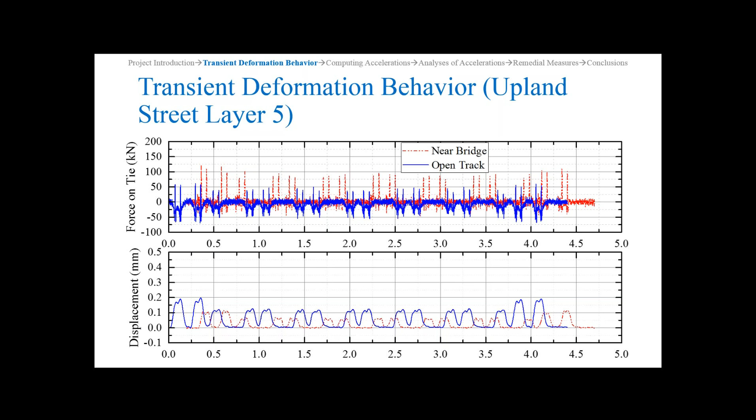And also for layer 5, which is the deepest layer, we see again we have small deformations compared to what we observed in layer 1, and in open track location it displayed again slightly higher deformations than near bridge location.

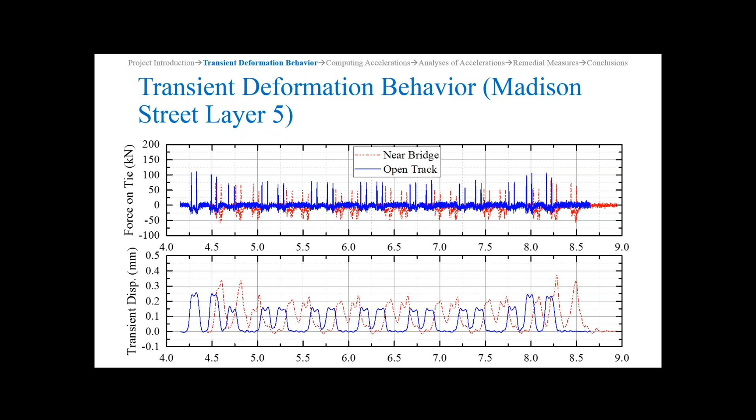So we summarize the contribution of the layer 1 deformation to the total deformation in percentage, and we realize that more than 50% of deformations occur in layer 1, and actually in the Upland case they are significantly higher than open track locations as a contribution. In Madison, they are again both over 50%, except for August 2012 measurements, where we have a higher percentage of deformations occurring in open track location.

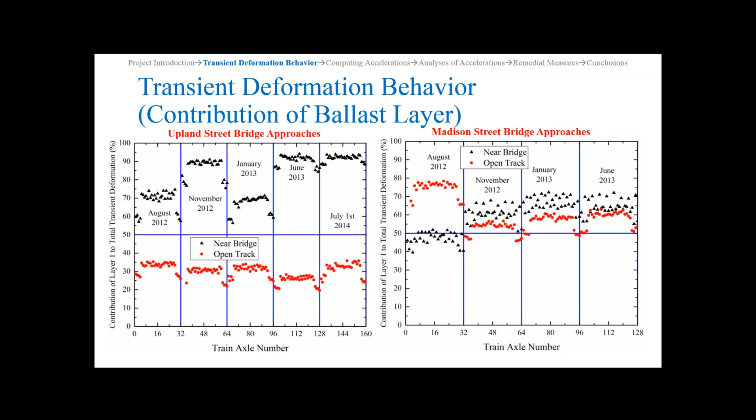Now, this specific equation has a disadvantage of losing 3 points at the beginning and the end of the displacement time history, but again, we use a sampling frequency of 2000, and we start the measurements before the train hits the instrumentation location and stop it after it leaves. So it wasn't actually a very disadvantageous thing. It was quite negligible.

The reason is that since we have a sampling frequency of 2000 Hertz, we have information in the displacement time history from 0 Hertz to 1000 Hertz. So we need to choose a filter that will give us what we focus on in this project. This displacement time history includes information like, to give an example, not just what we're interested in, but rail surface roughness, wheel problems on the train, and train suspension problems alike, which we were not interested in. So what kind of filter should we use?

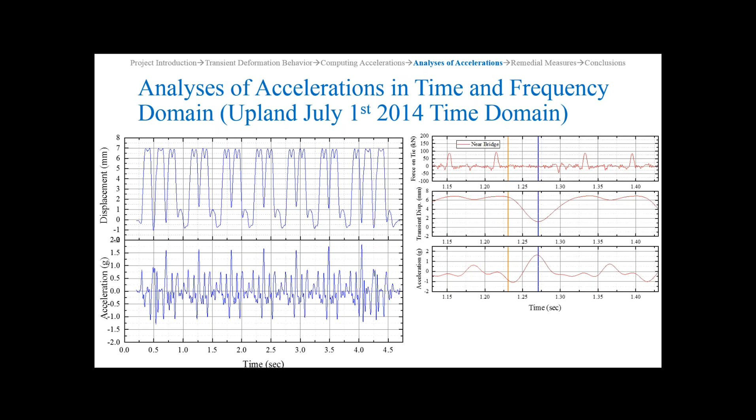When we use fast Fourier transform and convert from time history to frequency domain, I should highlight that the second y-axis in these plots is scaled using the maximum obtained from the near bridge location, keeping them the same and scaling the second axis to compare both figures, because it was nearly impossible to put them in the same figure, as the open track locations are significantly lower than the near bridge location. We see the trend for open track location has peaks observed between 15 to 17 Hertz, which corresponds to axle spacing. But for the near bridge location, the peaks have been obtained between 7 Hertz to 13 Hertz.

Again, remember we have a 12 feet distance for the bridge, so this falls into the domain for this location. We can see from the acceleration frequency domain that we have significant contribution due to the bridge rather than the open track location.

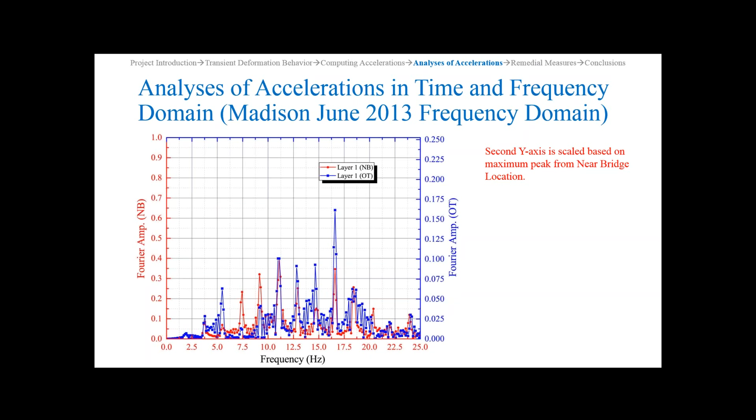Now we realized the main problem is the tie gaps due to differential settlement. The main problem is the tie gap, so the remedial measures we applied should fix that problem. We have used three remedial measures: polyurethane injection, under tie pads, and stone blowing.

Polyurethane injection, or chemical grouting, was applied at the previously instrumented Upland location. Stone blowing was applied at the previously instrumented Madison Street bridge. And we instrumented a new location that we did not have previous information on, which was under tie pads. It was still on the Upland Street bridge, but at the other side of the bridge on a different track—this is like a 4 parallel track.

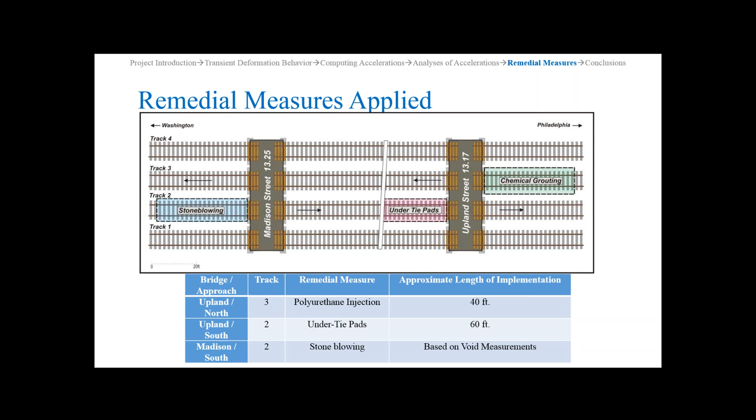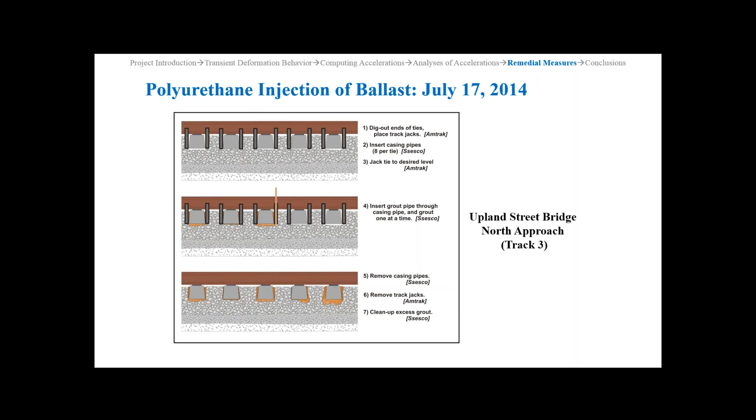Now when we look at the polyurethane injection, the point was that we hope to insert those tubes, then put 2-component polyurethane inside those tubes. This polyurethane works by having 2 components, and when they mix they immediately start to expand, so it becomes a foam. We were hoping to fill under the tie with that foam structure using the polyurethane.

When we installed that, we realized we had a lot of trouble actually injecting the polyurethane inside the tube, because the track was significantly degraded. There was a lot of foul material. So we can actually see glue coming out as foam as we install and insert them inside.

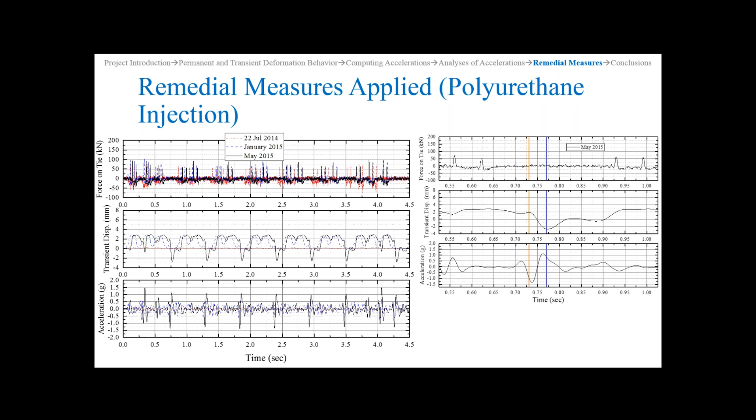Now we also applied stone blowing. The purpose of stone blowing this time was using smaller particles, which were half inch to three-quarter inch particles. We lift the track, we lift the tie, and we insert smaller particles under the tie, filling that gap with smaller particles to supply new support.

And you can see the permanent settlement behavior. There were problems with the LVDT, so we had to reset them, but you can see what happens after stone blowing—we lifted the track, and you can see the deformation behavior. It doesn't deform a lot.

But now when we look at the time histories this time, those are all again near the bridge. We do not see significant deformations in January. In May we do not see significant deformations either. There is no significant negative displacement—there are some, but they are not significant, around 0.5 millimeter, and those accelerations are less than 0.5 G.

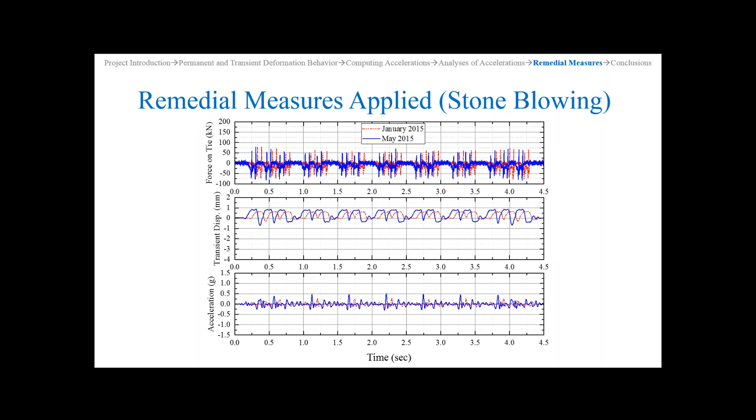So basically, we can say that stone blowing works in terms of supplying support under ties to prevent lifting and excessive dynamic loads.

Under tie pad location, under tie pad installation: what we have done here, those ties include under tie pads already installed. Basically, they are the elastic pads glued under the tie, and we replaced 30 ties from the bridge as a block of ties and placed the under tie pads in this location.

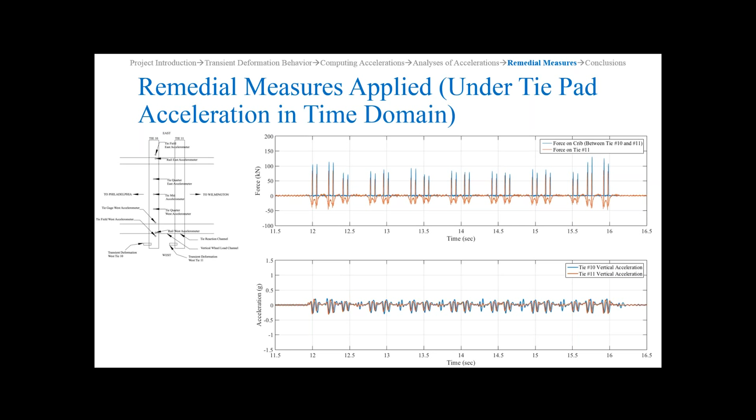But again, we did not have multi-depth deflectometers in this location, so we used a different instrumentation to calculate the transient deformation. As you see, with the under tie pad installation, we do not have a significant vertical deformation, as well as no negative displacements. And when we compute the accelerations, they were small.

And again, when we transfer those accelerations from the time domain to the frequency domain, we have seen a good trend, which is the axle spacing frequencies display higher peaks than the bridge distance.

With that, I'd like to conclude with 3 points: the ballast layer is the primary source of transient deformations near bridge locations. Negative displacement observed near bridge locations is caused by unsupported ties, which was the main problem of bridge approach problems. And remedial measures to supply lacking support to unsupported ties remediate the problems observed, such as stone blowing.

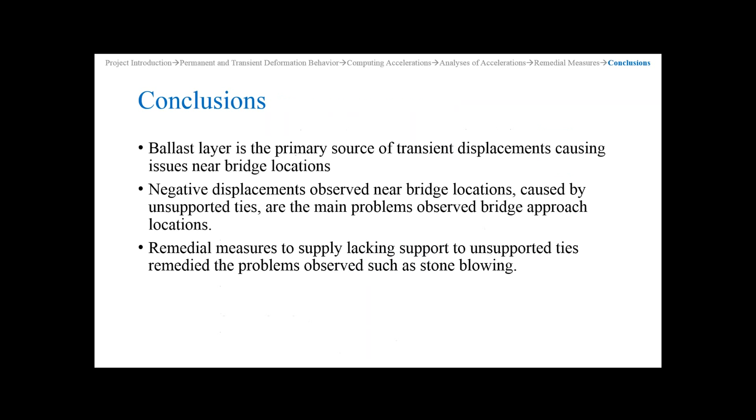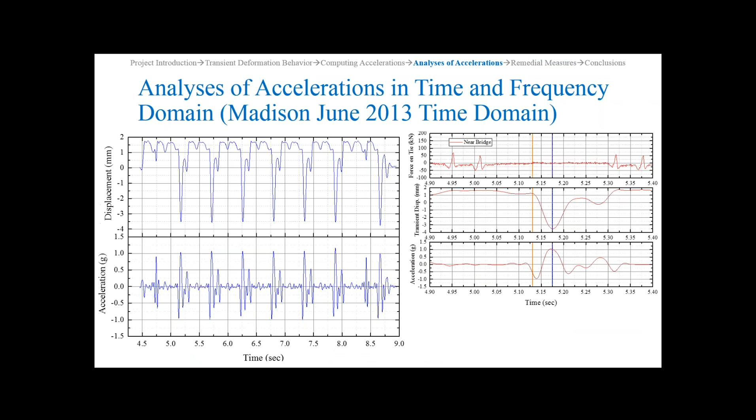If you have displacements, you have everything crystal clear. Actually, that's what we did. We used one of the ballast deformations with one LVDT measured, and that's how in the 30 tie track panel case, we were able to check accelerometer readings with the way we did filtering for results with the LVDT installed displacement measurements and the accelerations based on that.

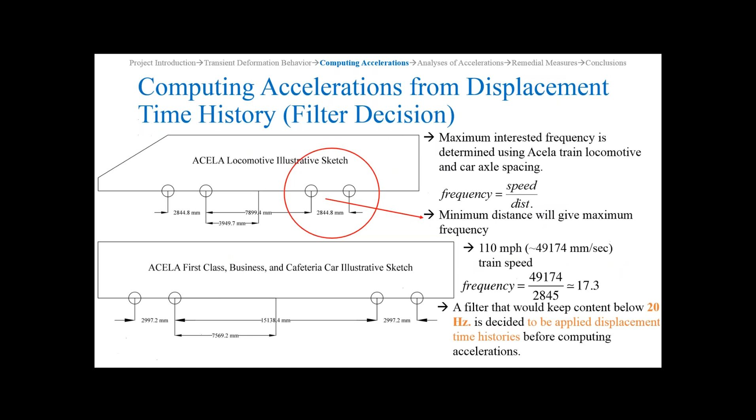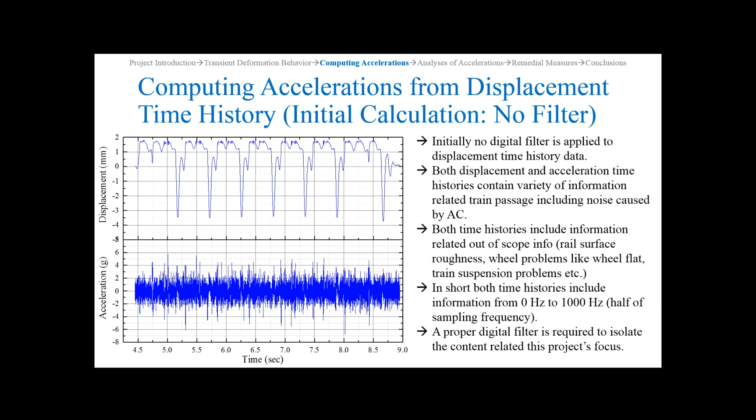So using the same concept, we were able to do all the other MDD results. So if we had used acceleration directly at first, we wouldn't be confident to use a 20 hertz filter because we would not have this plot in displacement. You can see here that actually the content is below 20 hertz. With accelerations, if we apply this filter directly, we were going to reduce significantly, and we were not going to confidently see what's happening, what is the important content that we are interested in.

This is another point, a follow-up question. Because geophones and accelerometers are commonly used when you really want to monitor high frequency movements. This is earthquake instrumentation, FWD as well, because we really apply an instant pulse loading. I think there must be a reason why people have been using geophones or accelerometers. One of the things I'm thinking about is, in high-speed measurements, are you using LVDT with a spring?

No spring. Well, they're not spring loaded. You don't have the luxury to be able to install MDDs at every location where you want actual dynamic responses, right? That's going to be so costly, almost impossible. Accelerometers really help with that, with any anomalies and things.

If you stick with the way that you filter and analyze the accelerometer data, that's what people are doing. But then, depending on the different dynamic loading trend, different train loads and things, axle spacing, like he mentioned, some of the filtering techniques may cause missing data, and you may not be seeing the full picture.

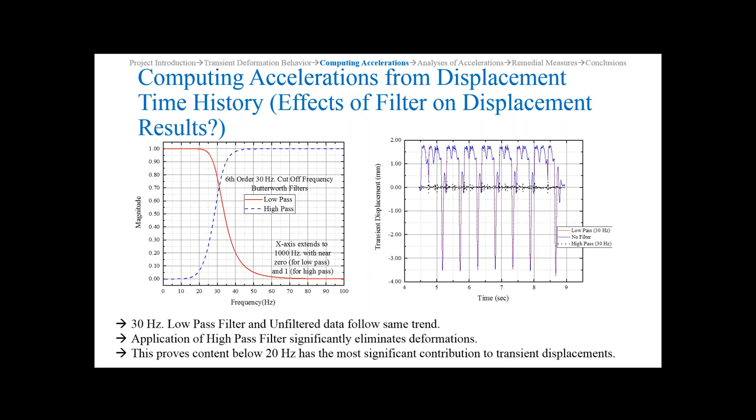But again, I think you missed that one, Hussein, but you should remember, when we go back to the track panel, where Mike Thomas instrumented accelerometers right there, putting them in different places, at really high frequencies you can see the bending modes of the ties. That's how some of the RailTEC researchers are working now on tie designs and things. So, it depends on what kind of dynamic loading aspects, but again, that wasn't our objective.

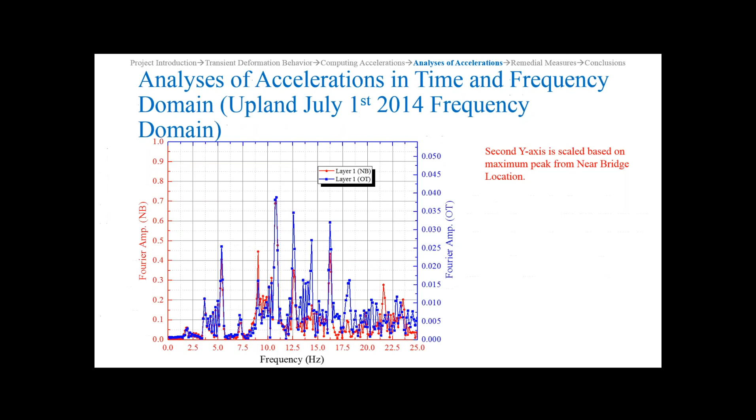Our goal is to track substructure vibrations. This tie wasn't the focus of this presentation, but if you look at this figure, you see there are six accelerometers, and eight total on this tie. They are installed on the rail too, at different locations of the tie. This wasn't to investigate transient deformation, but to investigate the bending of the tie.

Is there any effect of moisture in what you're measuring, in the track structure substructure? We haven't specifically looked at what moisture does to the substructure, though we have measured displacement in four climates. Is a certain set of data affected by high moisture in springtime? Yes, in January with freeze conditions we have smaller deformations, and in spring we have higher deformations, but we did not specifically focus on that.

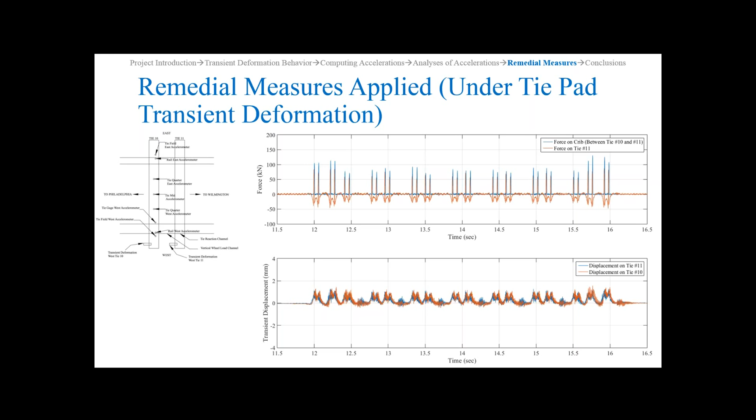One of the things that really worked very well is stone blowing application, and we didn't expect this to work that well. I don't know if Hussein can comment on that. What's going on in stone blowing and why? Here's the thing, how it worked and why it worked. Well, let's get Hussein on why it worked.

In fact, every 3 months they used to have this gap opening in those instrumented ties at the bridge approach. After stone blowing, for 12 months, almost a year, there wasn't much tamping or maintenance needed. It used to happen every 3 months. I was just talking to one of the AMTRAK people yesterday. He was amazed at how stone blowing, being an old approach primarily used in the UK and Europe and not much here, they even have huge equipment to do that kind of maintenance activity in Europe, but not here.

It clearly helps because of what? Let's say this is the original position of the rail, and there is a gap underneath, and we have ties near the bridge, let's say 6 or 7 ties at that location, with the distance between ties being 2 feet. Now when the wheel hits that, it basically deforms the rail, leaves it, and the rail wants to go to its original position, gaining momentum and acceleration doing that, and it jumps.

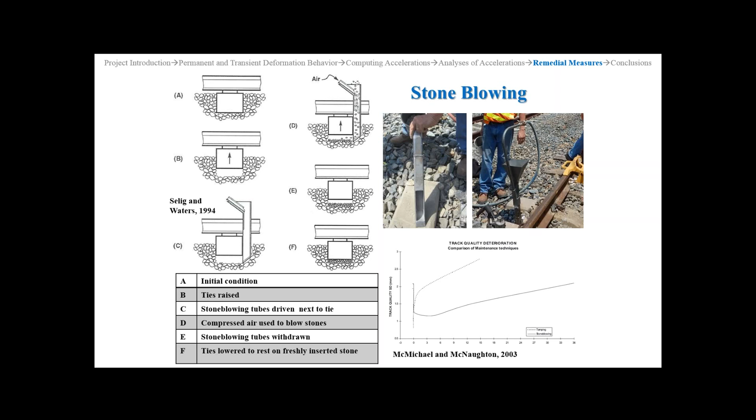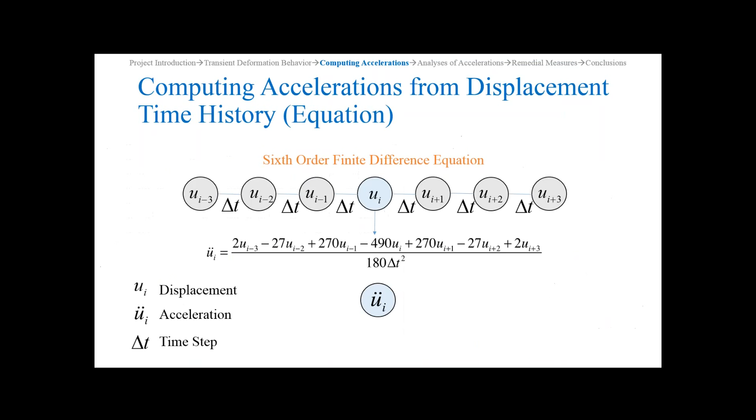When we instrumented the loading, I should go back to the beginning for the strain gauges, what we did there. But those are field responses, right? Yes, so I was asking in terms of applied loading, which leads to another follow-up question. We can ask that after this.

For that one, we have two shear strain gauges, one on top of the tie and one on the crib side. By crib side, I mean between the ties. We assume that with the displacement here, this load is full, so we can calculate the tie support by comparing this load to that load.

We analyzed those and saw differences between the near-bridge location and the open track location. Usually in the open track location, where there is good support under the tie, we see a good percentage of tie support. But near the bridge, if there's a void underneath, or issues with the ties, we did not see that.